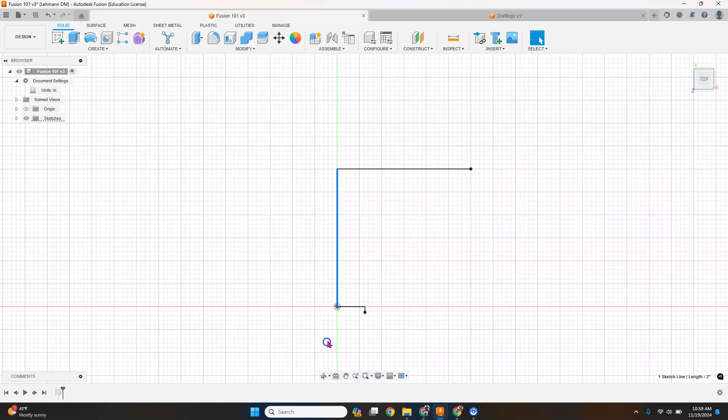Now what we're going to do is a lot of lines. One of the things that's handy is remembering that the line tool is the letter L. If you select it, you'll have that piece on here. Now please don't click and drag, just click, move, and then type in the data that we need.

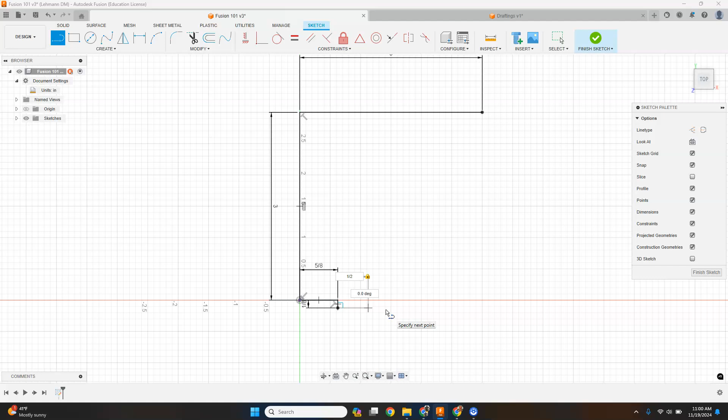With that being said, the first one's 5/8 inch, I'm going to hit Enter. Then I'm going to hit L again, click, and move up, and type in 1/8. After we type in 1/8, we hit Enter again, and continue that process across our piece.

So now, next thing is L, click, move, 1/2, Enter. L, click, move down, Enter, 1/8 inch, Enter. Continue the process: L, click, move over our 1/2 inch, Enter. L, click, move up, 1/8 inch, Enter.

L, click, move, 1/2 inch, Enter. One thing I'll show you in this next one: if you hit L, you can click on this piece and go over to the last spot we were, hover over a bit. If you slide that over, it kind of snaps and locks on - see that little dotted line that showed up? Then you can continue that process to, I believe, our last step ending.

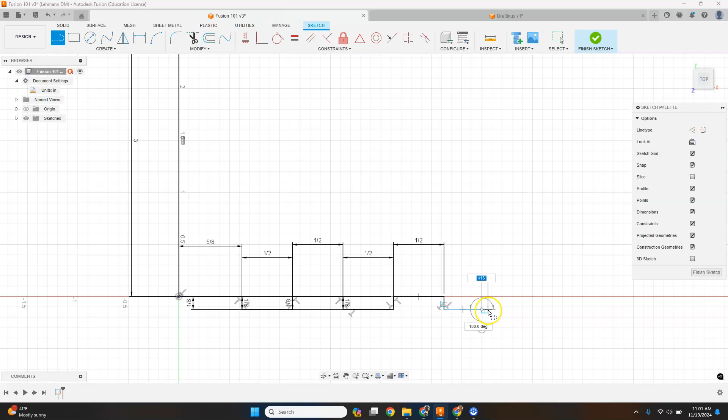Well, right about here, 3/8. I'm just going to hit Escape to stop that. Sorry, I messed up that last portion, so I'm just going to select that and hit Delete.

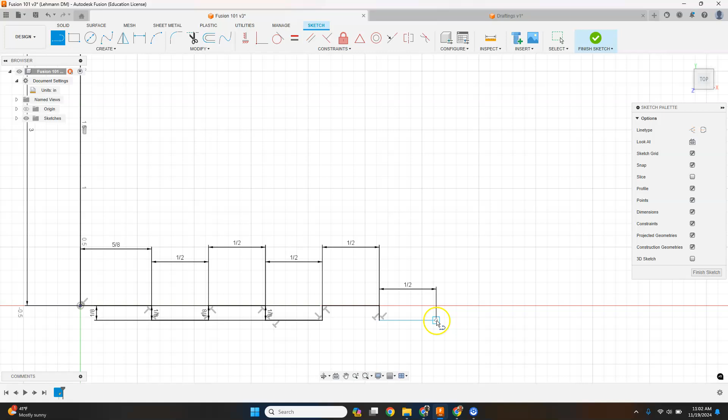And then continue that process of L, click, slide 1/2 over, Enter, L, click, slide over my last point, hover for a second, slide it across, snap, and now I have 1, 2, 3.

I think I have one more to do. So 1/2 inch across, Enter, L, 1/8 inch down, or hovering, selecting and going back over.

Let me just go back to refer to my plan here. Oh, wrong selection. But I have 1, 2, 3, 4, and then my last one ends with a 5/8 again. So just making sure that I'm there. 1, 2, 3. This will be my 4.

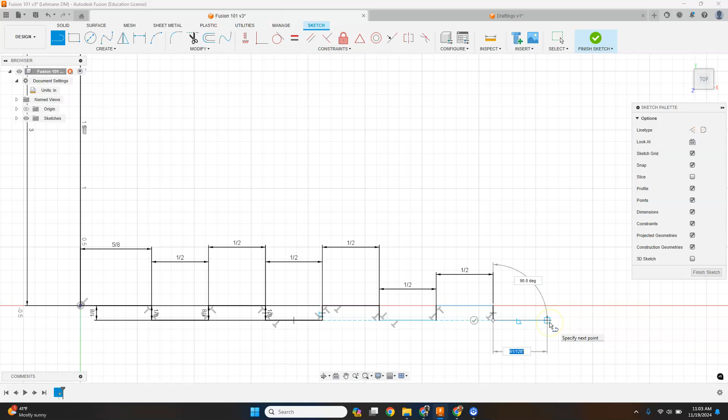So a 1/2 inch across, 1/8 inch up, and then ending with a 5/8. Enter. Now we are across the whole bottom of our piece.

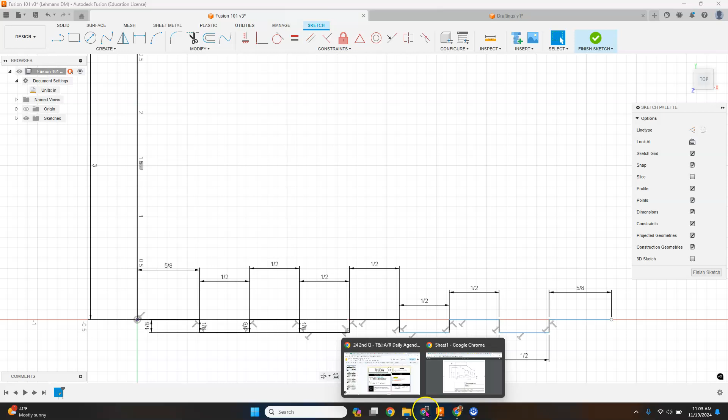The next thing we have to do is go back to my plan, and make a 1/16... sorry, a 1/8 of an inch going out and a 1/8 of an inch going up. Then we're going to make a little arc off that piece.

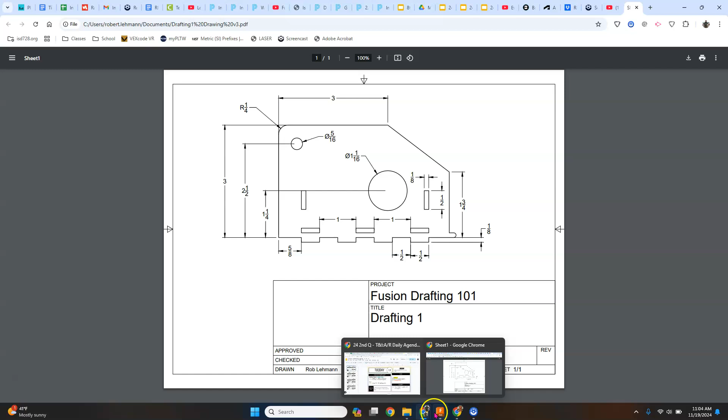So how we do that is go back to our piece, and the first thing is I'm going to select that last little thing we did. We got 5/8 there, and we're going to extend this portion out by selecting the line, clicking, moving out an 1/8 of an inch, Enter, going up an 1/8 of an inch with the line tool again, Enter.

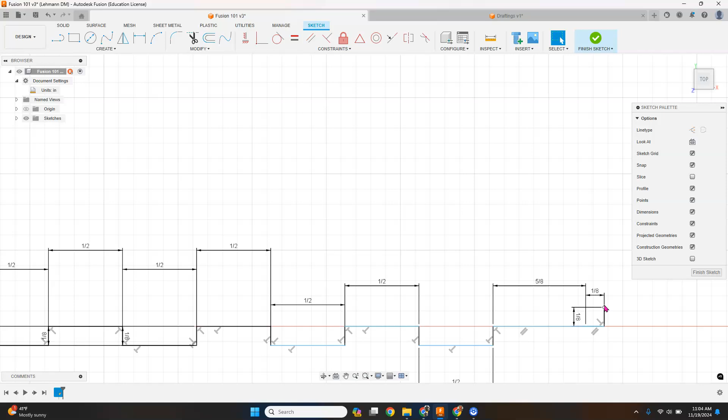And then lastly, going back into that 1/8 of an inch. So line tool, back into that piece, 1/8 of an inch, kind of where we started off being. That same point, slide up, select. Now I'm going to hit Escape so you stop seeing that - this little piece right here built out that we're going to add a little radius to.

Now the way we're going to add that radius is by adding a line in the middle that's actually going to be a construction line. It's not a line we keep, just using it for a data point essentially, or a guideline. So we select that line type, slide up, and you'll see the middle snap. We want to select that, and we're going to go out 1/16 of an inch.

Enter. Now we have that data point. What we're going to do with that data point is come up to our create arc, and use a 3-point arc to select the first point, select the second point, and then bend it to that guideline spot right there.

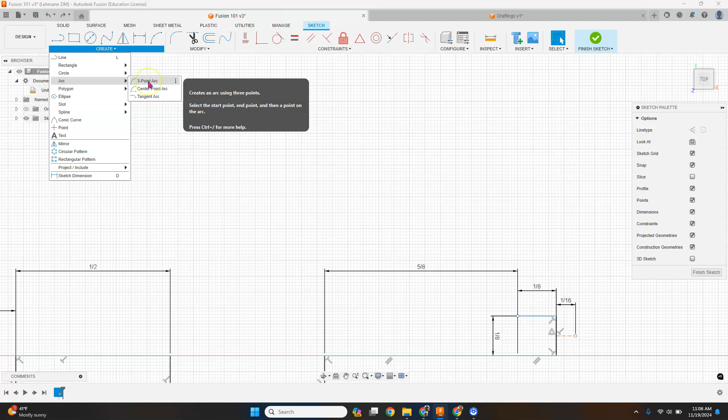Oh, I messed those up and made it guidelines. So I'm going to edit undo, and make sure I deselect the construction type there so it's not guidelines. This time, when I create my arc, it'll be right. I make mistakes too - I'm learning this program at the moment.

Now in here, once again, select, and then bend it out into that point and drop it. Now the one thing we can do, or should be able to do now, is select and delete that middle line, because we don't need this little portion right here.

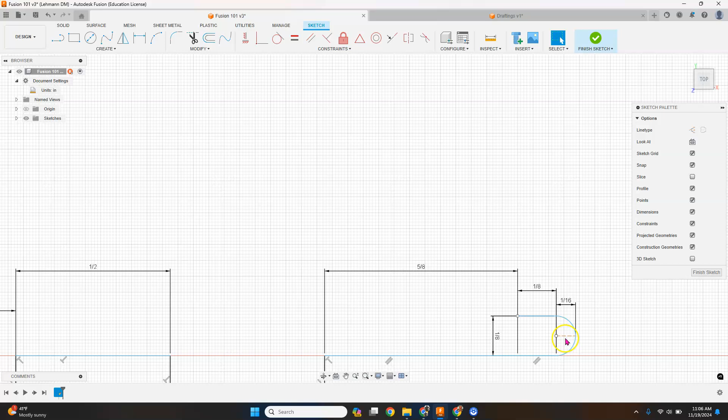All right, now with that being said, we can get ready to go up the rest of the side. And actually, that's where I'm going to stop this video. We can set the next process in the next portion of the video. But anyway, that gets us all down and around the bottom.